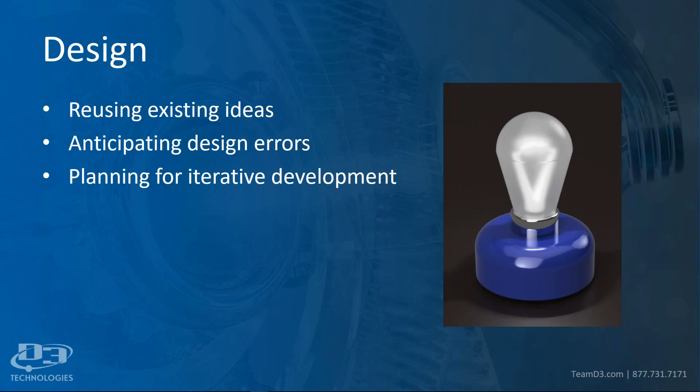All right, just as a run through of what you're going to see in this webinar, I'm going to go through design, talk about reusing existing ideas. If it ain't broke, don't fix it type deal. Anticipating design errors, which, to be honest, if you're working in a team with humans, then there will be errors and there will be problems. So planning and having a nimble model or assembly and a nimble process that allows you to adapt is something that I look for and that I try to develop. And planning for iterative development. So knowing that you are going to go back and make changes again and again and again, and making it easier and facilitating that in your model and in your assembly.

For 3D modeling, I'm going to talk about planning for change. And this is essentially the core of parametric modeling. Keeping dependent features healthy. So if I have a feature that changes a previous feature, I want to make sure that if I make a change earlier in my timeline, that I have a cascade effect that doesn't disrupt my model downstream. All right. I want to talk about shifting from single body to assembly design. That's something that is a little bit different in Fusion compared to other 3D parametric softwares, because in Fusion you can have your assembly inside of a single file. And you have internal referencing, as opposed to most other 3D parametric softwares that use external referencing for bringing parts into assemblies.

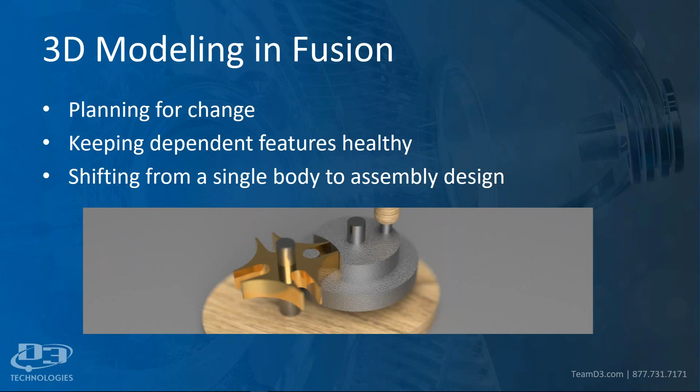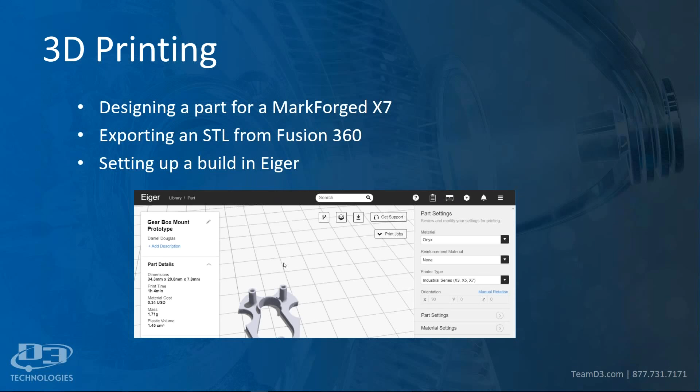And as far as 3D printing goes, I'm going to talk about designing a part for a Markforged X7, which is the printer I was using. I'm going to talk about adjusting your plans and ideas based on what you know is going to happen with the material, both the flexibility and the nature of the material, but additionally, the kind of tolerance issues you will have with printing. And so we'll talk about thinking ahead for that. I'm going to show you how to export an STL from Fusion 360, and there are a couple ways to do that. And then I'm going to talk about setting up a build in Eiger, which is, once again, the proprietary slicer for Markforged.

All right, so back to this drone right here. I crashed this many times, and I realized that I needed a replacement. It wasn't flying right anymore, and the frame was shattered and glued together, and I couldn't fly it. So in addition to that, the motors were getting tired, worn out. They were brush motors, so they have a limited lifetime, but I thought maybe I could extend that a little bit and get a little bit more fun and learn some things. So I decided to create this.

Now, the first thing I had to do is determine what to keep and what do I want to replicate that's already there. This is part of reusing ideas. You don't want to reinvent the wheel. You want to reuse what you have, and you want to be efficient. Now, let's talk about this. I'm going to go over to Fusion.

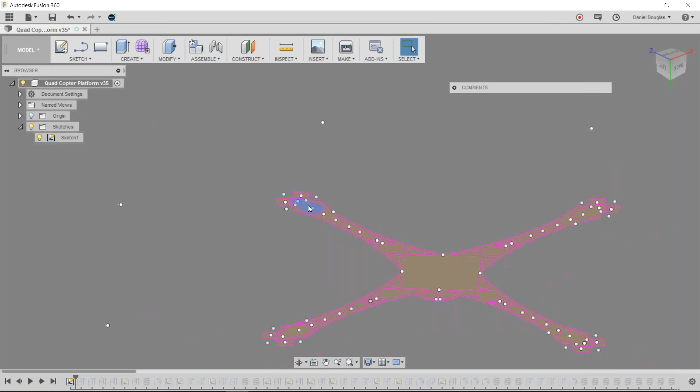Now I'm inside of my part here. I started out with just modeling a single motor mount. I wanted to get as close as I could with a single part, and I was planning to do prototyping. So I wanted to be able to cut my model up into pieces and print one piece at a time and test it without printing the entire chassis and wasting material. And that is what I did.

However, because I was working on it over time, I kept referencing back to my initial sketch, and I made most of my alterations to that initial sketch.

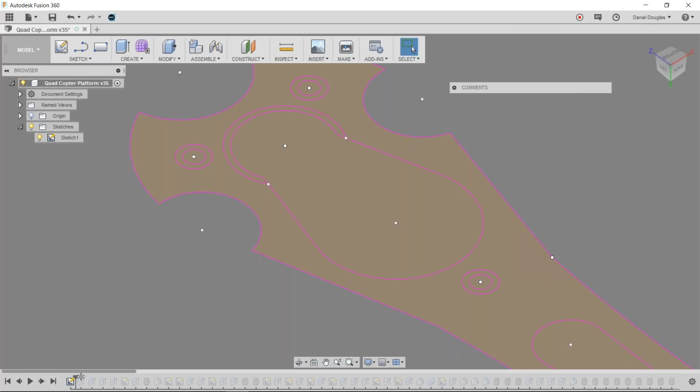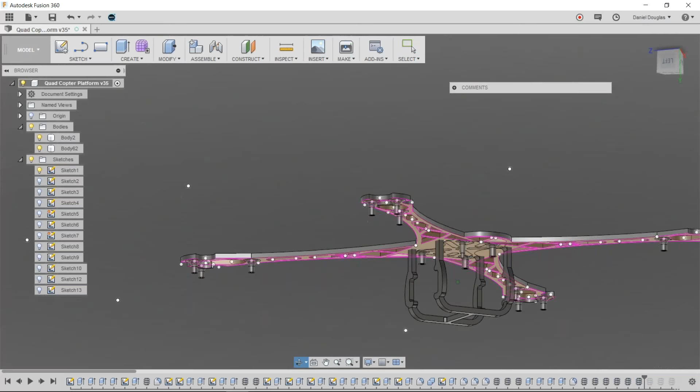My process for creating this model was based on the requirements of the existing chassis. So if I can switch back here. I was aware that I would need to be using fasteners because you'd have a lot of vibration and a lot of torque, and so I knew that I would have to mount this motor assembly directly to the frame. The existing chassis has a lot of plastic that protects the gearbox and protects the components, and I knew that in order to reduce the weight, I would have to eliminate a lot of that.

I did so. I knew that I would need to keep that motor assembly, so I mimicked the interior of the chassis for the mount points. I tried to do so as accurately as possible.

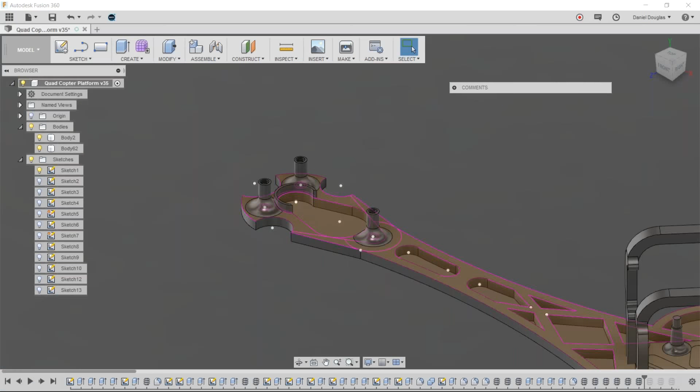Even with that, the tolerances of printing on a Markforged required me to try a couple of different iterations before I could get an accurate matchup to the part.

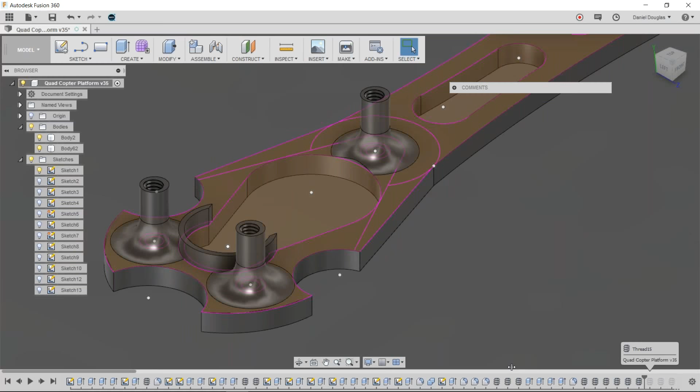All right, now we're going to examine my timeline here. I'm going to roll it back to this point. Once I had created a rough replica of the mount, I then printed this and made sure that everything lined up.

A part of the prototyping process means that you will have errors, expansion of the material, especially with 3D printing and so on. I ended up doing multiple iterations, stepping back and forth, so I'll show you those.

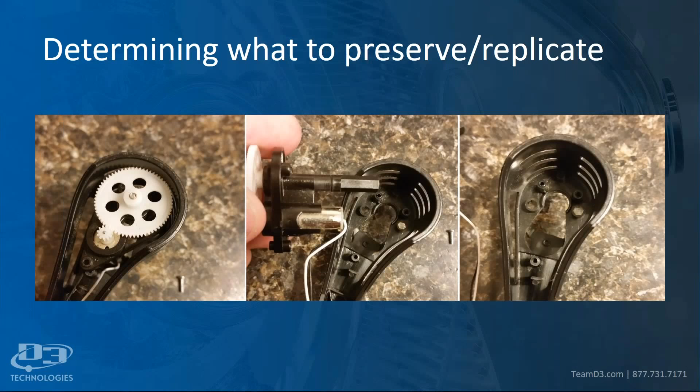Now, in order to test the threading, I did that second. I reduced some material and I made a few adjustments to the location of those fastener posts.

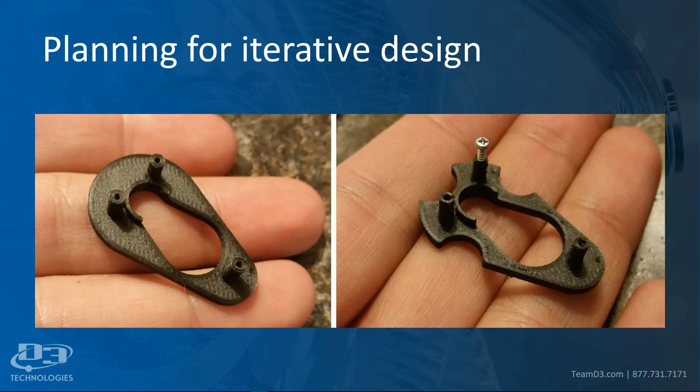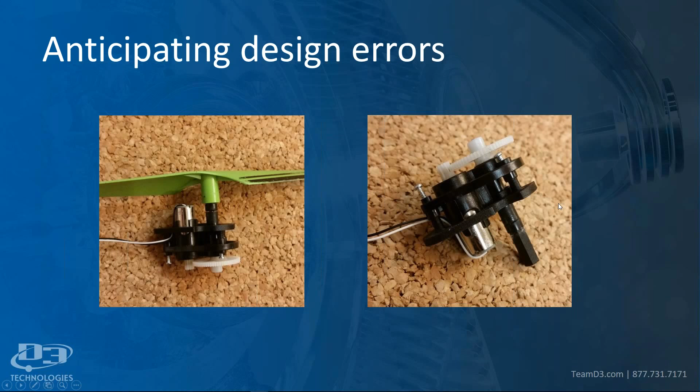It took me a few tries before I could actually get it to mount exactly. And even then I had issues with vibration that were shearing off the post. So then I created very large radius fillets around the base of the posts in order to give them more strength, and it made them very robust and got rid of my shearing issue.

Now, after I prototyped the mounts, I had to move over to the actual control board. I wanted that to be as safe as possible, for a variety of reasons. I didn't want to crash and immediately damage components and never be able to fly again, so I wanted to be in the safest spot on the chassis that I could put it.

So the first thing I did, once again, was determine that I need to replicate this mounting system here. And I determined that I would need to probably print it as small as possible so that I could do multiple iterations and not waste a lot of material, which is what I did.

And I allowed the board to be mounted in the lower part here, and then I created a cross section to slide the battery in, and that gave me a lower center of gravity. This is actually the bottom of the quadcopter, and the top would be on the ground plane here.

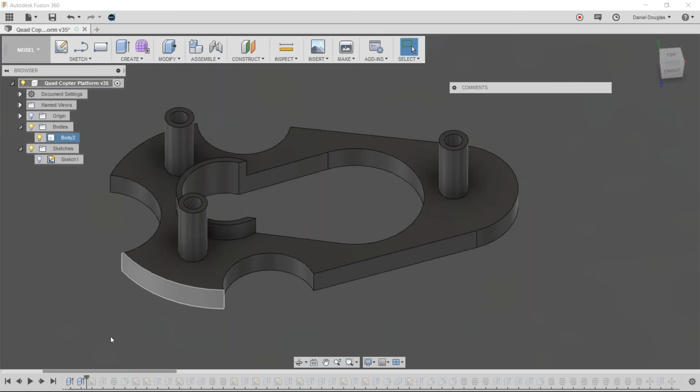So I'm going to switch back over to Fusion. You can see the fillets that I added for increased stability and the threading.

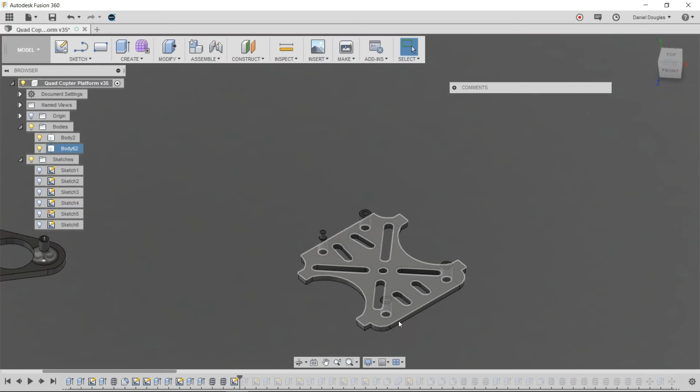Now here, as I move back and forth on my timeline here, you can see the process. I began by placing the mounts, creating this perforated base so that I have reduced material, and I built it up.

Did that H junction up there on the top. I knew that I was 3D printing, so I kept that in mind. I realized that my layers would create a weakness on a vertical rise like this, so I tested a couple of different configurations on several occasions just to make sure that it could withstand a variety of stress levels.

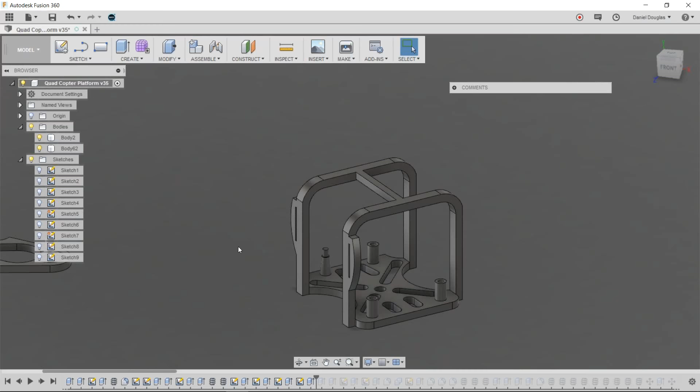The material that I was printing with, Onyx, which is a Markforged material, is extremely resilient and can take a lot of damage.

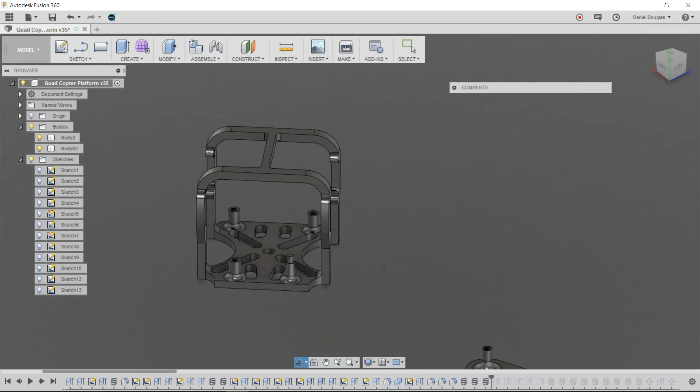As we move forward, you can see there are dependencies that I had to account for, and I had to go back and double check and make alterations. There are a lot cleaner ways to go through this process, but I had not designed a quadcopter frame before, so I wanted to keep as many of my parts together as possible.

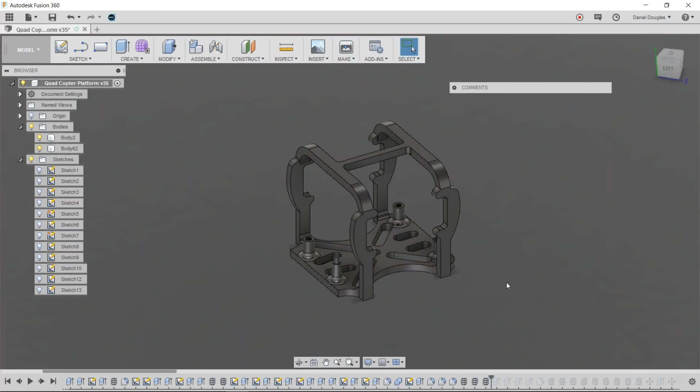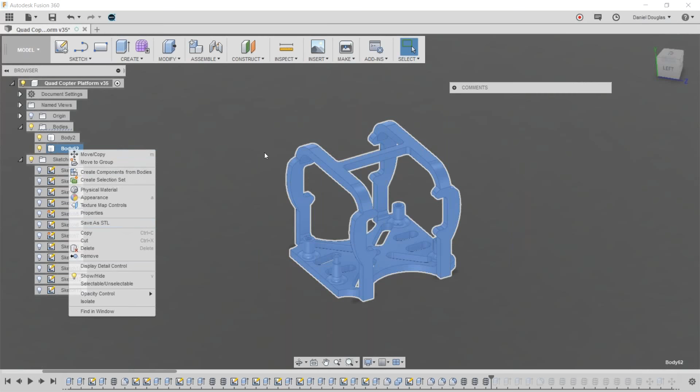Now I can save it out as an STL, and then upload it, or put it on a flash drive, whatever I need to do. I also have an option under the ribbon here, the Make drop-down menu. Right here it says 3D print. So 3D print versus export as STL, they are exactly the same. They both open this menu.

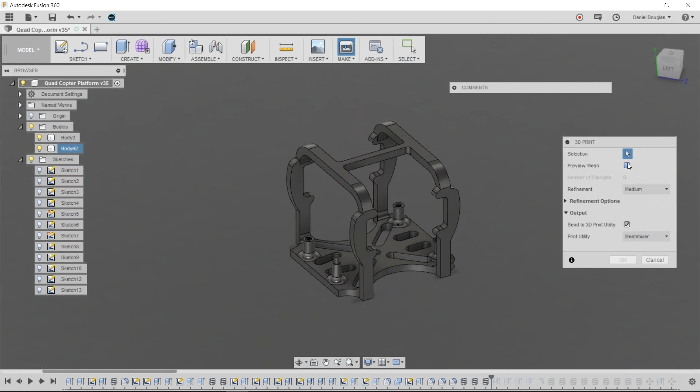Now, if I have my selection, I can preview my mesh. There we go.

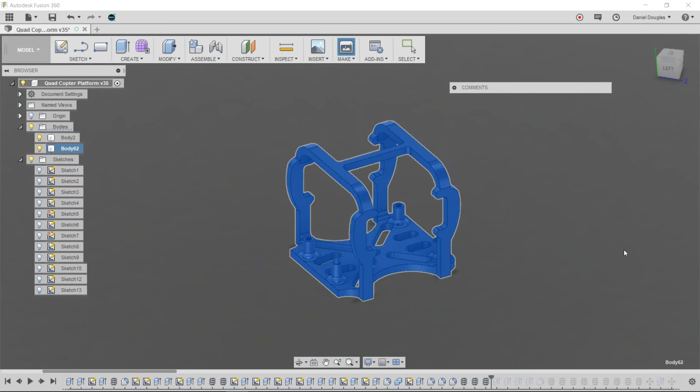In addition, I can choose to send to a 3D printer utility, which is an excellent feature. In this case, I could choose Meshmixer, Print Studio, Preform, or if I have another, such as Cura, I can select that, set that up, and output directly to it. That's a great feature. Now, in this particular case, I don't need to do that because I am using a browser-based slicer, so I just press OK. It gives me a choice to save, and so on.

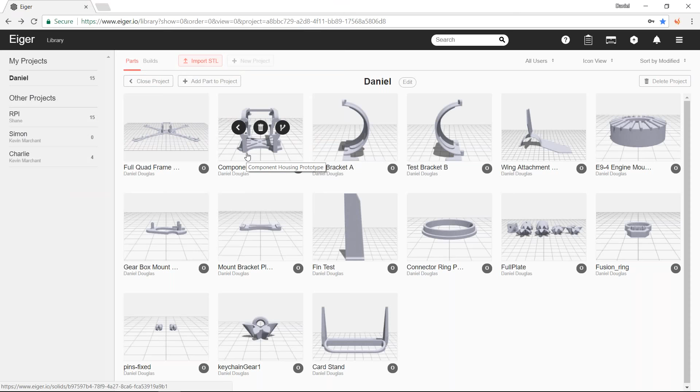From there, I would then go to Eiger, which is the browser-based slicer, and hit import STL. I select that STL, it imports it, and then I set it up. So here I have a couple of builds. Let's click on the component housing.

Now within Eiger, I'll just briefly touch on this. I can see what my dimensions are, have my estimated print time, cost of material, mass, and so on. Over here I can select my material based on the machine I'm using, which in this case is the X7. And I could choose reinforcing material, which I'm not doing. I'm using onyx, which for my purposes was perfect, very flexible, very durable, and very good at absorbing shock.

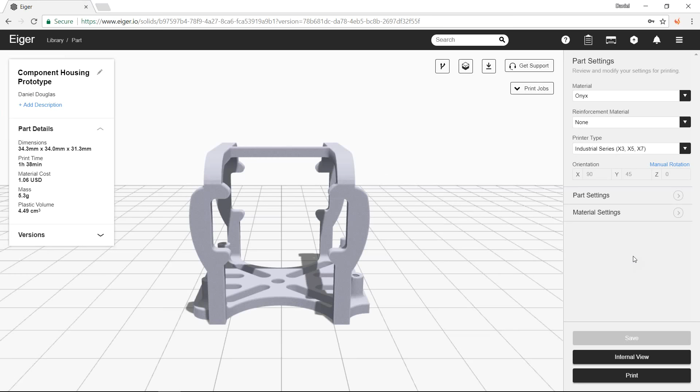Of course, if you brought in the model with the incorrect orientation, you can adjust it accordingly.

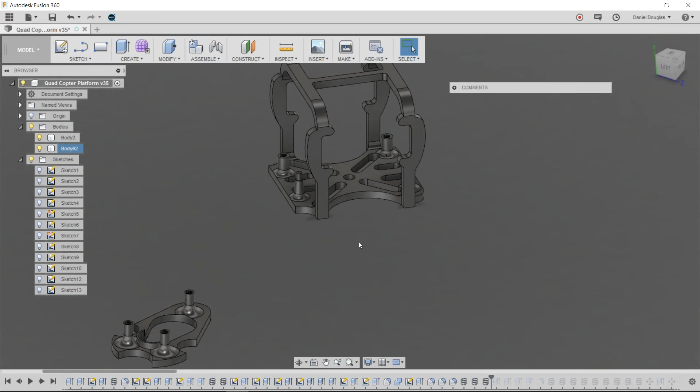So after I had printed, tested, and gone back and forth making minute adjustments, which I had to do, I had to move these jaws further apart. I had to adjust the spacing, reinforce, add fillets, change some fillet sizes because of interference and whatnot, make slight adjustments. There was probably between 3 and 5 prints per each of these, just doing fitting. And that was not bad.

Altogether, it was probably a very small amount of money compared to printing the entire frame, which would have cost essentially 4 of these or 10 of these.

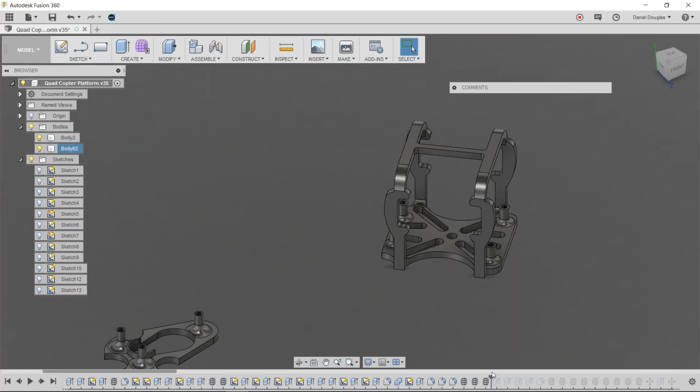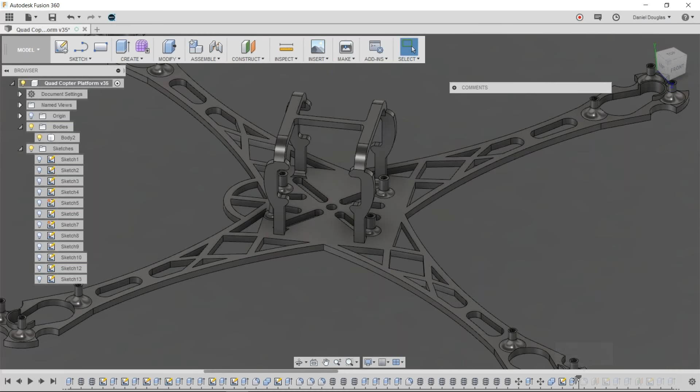Okay, I'm going to move forward here. Now, once I had determined all of my parameters, my most necessary parameters, and joined together my necessary parts, I performed a combine command, which merged the bodies together. So now I have a single piece. That was my intent. I wanted a structurally stable one piece to be printed, as light and durable as possible. Now, by making a single part, that means that if I have damage to any part of that chassis, I would have to reprint it. I recognized that that would be an issue, so I carried on and made adjustments accordingly.

I'm going to switch back to my PowerPoint. All right, now one of the things that was interesting, something you don't necessarily think about, is the expansive or compressive nature of the material while it's printing. I found that was a big learning experience, making adjustments.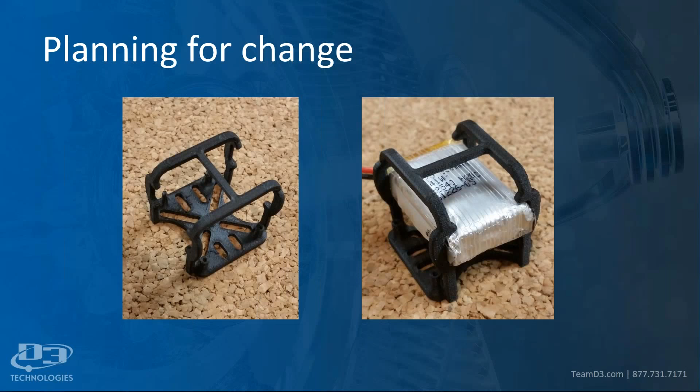Now, when I'd printed the full chassis, I took it inside and flew it, and the first thing that happened is I apparently made the chassis too light, and the quadcopter flew up and hit the ceiling at 1% throttle, which was 100% speed apparently. It hit the ceiling and sheared off a couple of pins, and I had to go back and reprint and double check.

When I finally was able to take it outside, one of the issues that popped up was impact on landing. These struts broke off the housing, which would have been all right, except that it wouldn't have happened if it hadn't fallen from 30 feet onto concrete, which was the issue. A gust of wind caught me, I went out of range, and then it just plummeted.

Now, here we go. Let me talk about shifting from a single design component over to an assembly. In my particular case, as I said before, I wanted to have a single component because I wanted that structural integrity and lightness.

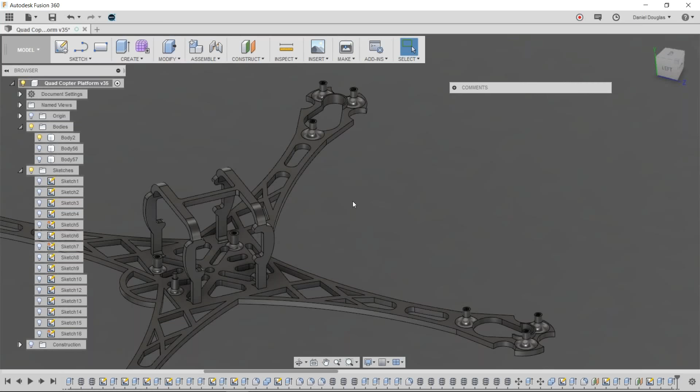However, I realized that since I made the quadcopter frame too light, I would have to add some weight and lower the center of gravity. So as part of that, I created a bracket system so that I could attach additional components directly to the T or the H junction here.

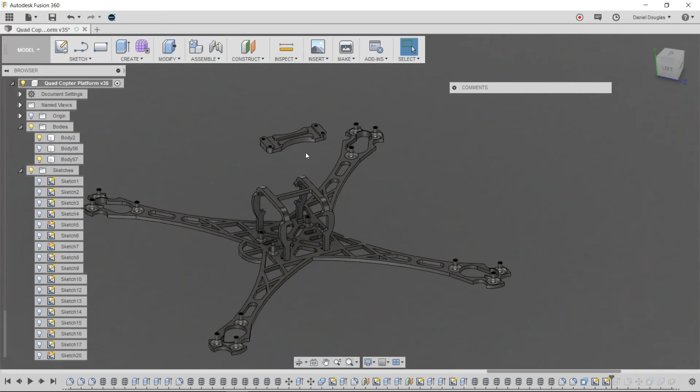Now I used a projection to bring in this geometry. First I used a construction plane. Working off the construction plane, I extruded the basic shape here, and then I projected the geometry from the H, and offset it slightly.

At this point, I had learned enough about the Onyx material to know that I was going to get a slight bit of expansion. I would not get a lot of contraction, but there'd be the tiniest bit of expansion - we're talking a quarter of a millimeter almost, so between a quarter and a third. So all the way around, you could have half a millimeter of difference. I didn't want this to rattle around. I wanted it to connect snugly, but I didn't want to have to force fit it.

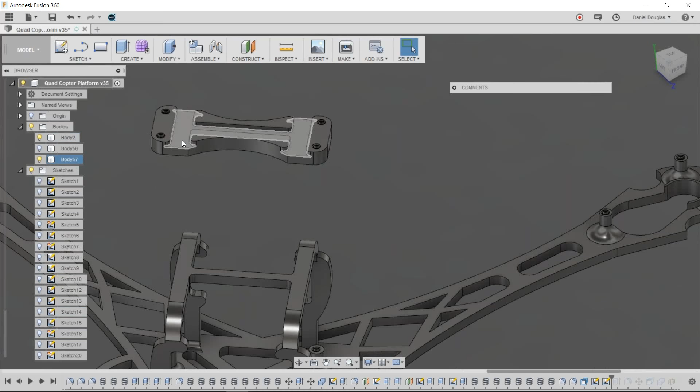So let's go into the sketch for that. Now you can see where I pulled in the geometry from the H junction, and I offset it by a quarter of a millimeter, which is what I had determined was the expansion.

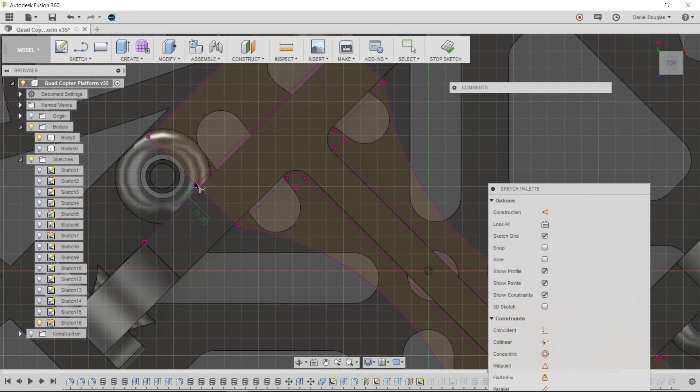Once I had done that, I did that all the way around. My assumption here is that these spars were going to be slightly expanded, and that as part of the expansion, the center here would be slightly wider. So instead of doing half a millimeter, which is what my brain thought at first, I realized that the expansion would also yield a certain measure of contraction in the center here. Once I realized that, I set it up just like this, and it fit perfectly. I was actually very excited about that.

Let me switch over and I'll show you the picture.

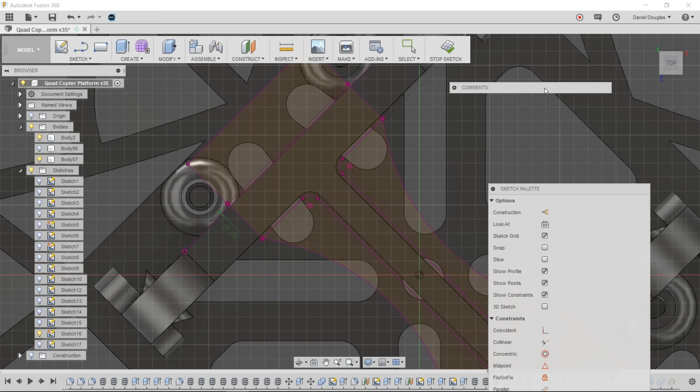Between those screws and the two brackets and the legs, I probably added a third of the mass of the dry chassis without any components on it, and I lowered the center of gravity somewhat significantly, which helped me a lot with stability.

Okay, and I'm going to go back and walk through that a little bit more. Okay, I'm going to switch screens again.

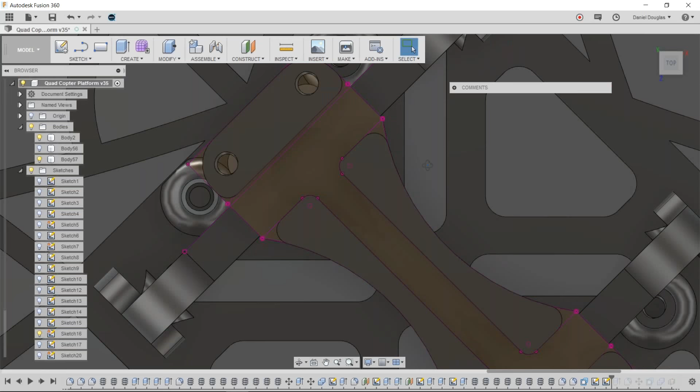Now, one thing that was of great amusement to me was that I made it too light, and I made it so light that it was actually dangerous to the electronics - sometimes you actually achieve your objective in design, and there are side effects. Let's see, I'm going to move forward on my timeline here.

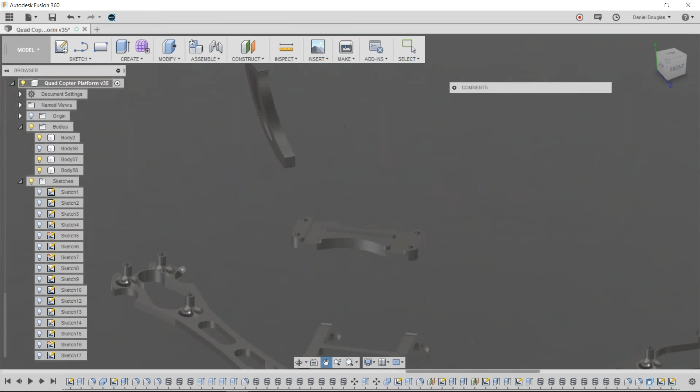I'm going to turn on that body. This is another aspect of designing in Fusion that I've started to do: I create multiple bodies and then merge them together.

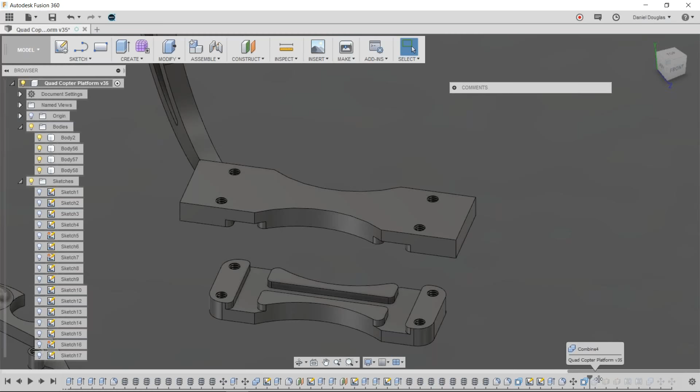Working out of AutoCAD for years, I thought of everything as a single collection of lines. Moving to 3D, it took me a while to adapt to the need of breaking things down into steps, features, and components.

For example, here I mirrored from here to there, and then I mirrored these two legs across. Then I combine them all together, and now I have a single body.

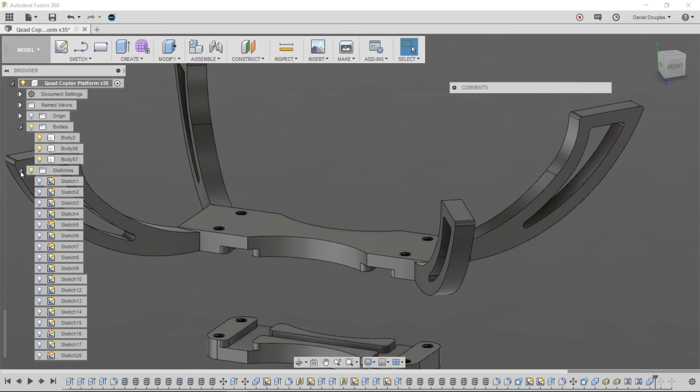For the purpose of this project and webinar, I operated out of a single component, and I have 3 bodies in here. Now I want to talk briefly about switching from a single part or single component to an assembly.

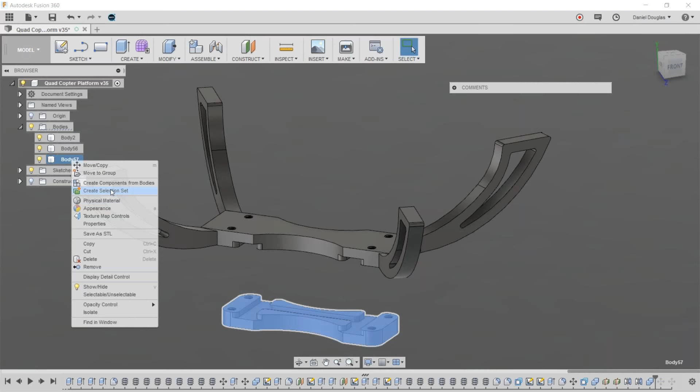Once again, we're doing internal referencing. I want this bracket, the lower bracket, to be in its own component and start its own history. So I'm going to hit create component from body, and now I have a component at the high level. I'll double click on the name and call it bracket, because we're very imaginative during webinars.

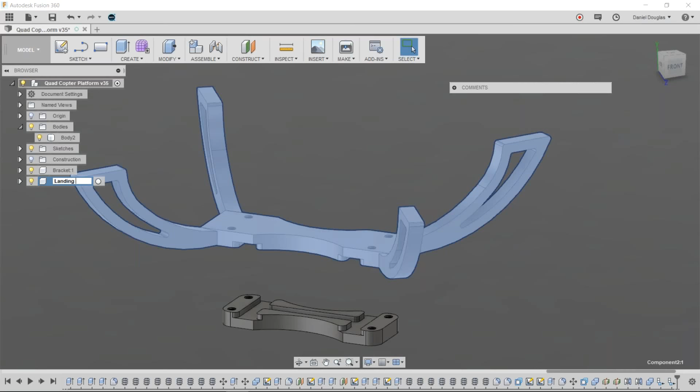For the landing gear, I'm going to hit create component from bodies and rename it landing gear. Then for the chassis, I'm going to also promote that to component status and call it the chassis.

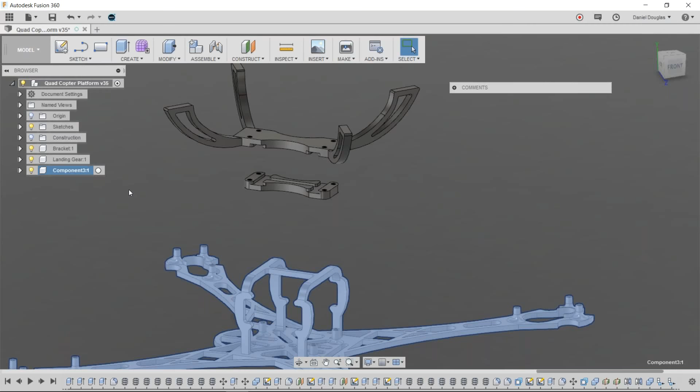Now, the benefit of a component versus a body is that now they have their own histories. So if I click on chassis, mouse over it, and click activate component, immediately the only item in the history is the promotion from body to component.

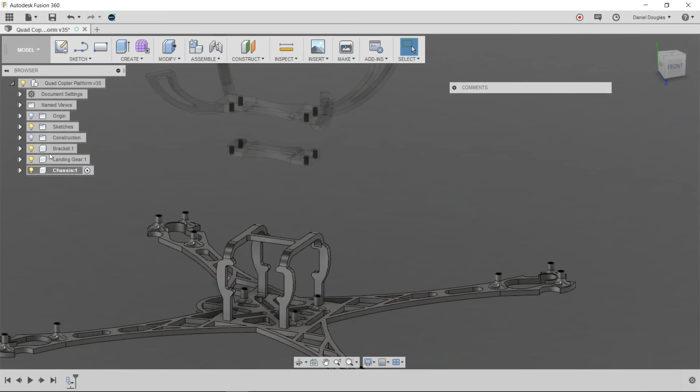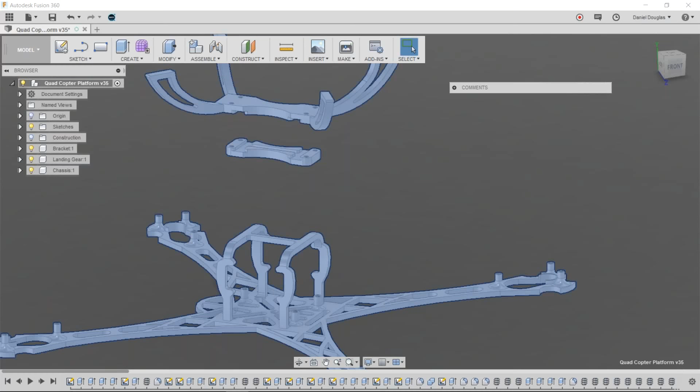Anything I do to this model now will have a separate timeline in history from these two, landing gear and bracket. Now, the disadvantage of converting after you've created them is that all of the history of all my components is in what is now the assembly, called quadcopter platform. So every bit of the timeline for every single component is in the assembly.

Now, if I wanted to plan ahead and create a new component now, because I know I have a bracket and I know I'm going modular, I can go up to the top assembly feature, right click on it, and hit new component.

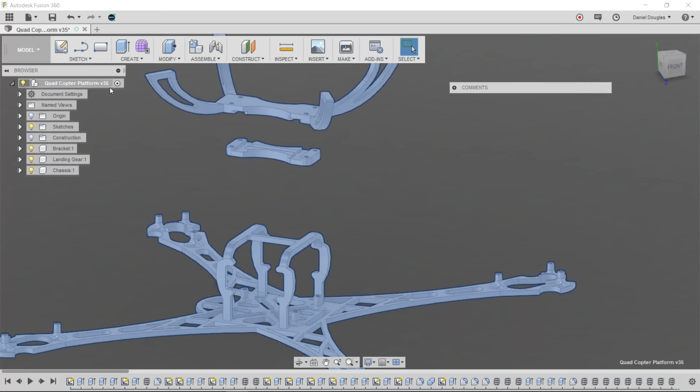Within that tree, I will have a component show up. I can then rename it and call that GoPro mount, for example, if that was my intent. Now I can begin work on a GoPro mount based on my bracket, and I can create that mount.

Maybe I want to create a gimbal, and I can bring in parts. For example, let's say I had a very specific intent—I could probably bring in parts from the McMaster Carr catalog, or I could try to do it from scratch.

Within this GoPro mount, let's say I find out that my GoPro mount is actually going to be a gimbal. I could rename it easily enough. But since it's a gimbal, it's going to have hinges and arms, and it's going to need joints, and it's going to be fit together and move.

But I don't want the gimbal to have a bunch of components like hinges and arms up here in the main assembly. So I can right click on gimbal and create a new component nested underneath the GoPro component. I can call this hinge number 1. As I go forward, if I have any sub-assemblies, I can divvy up and organize accordingly.

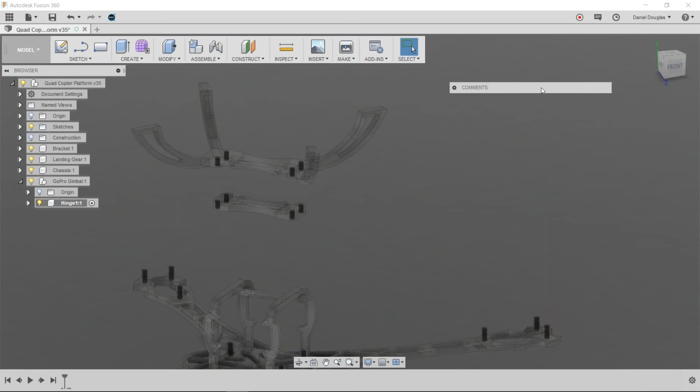Now I am at the end of this demonstration. I'm grateful to everybody who's tuning in and listening to me talk about this project and talk about Fusion.